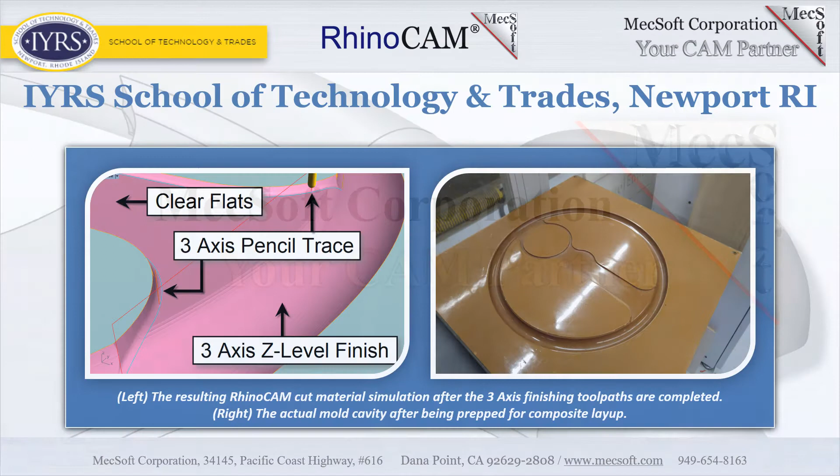Welcome to the MecSoft Student Project Series, where you can find real students in academia using MecSoft products in an educational setting. Today we'll see a composite marine steering wheel project created with the help of RhinoCam by student Simon Pride at IYRS School of Technology and Trades in Newport, Rhode Island.

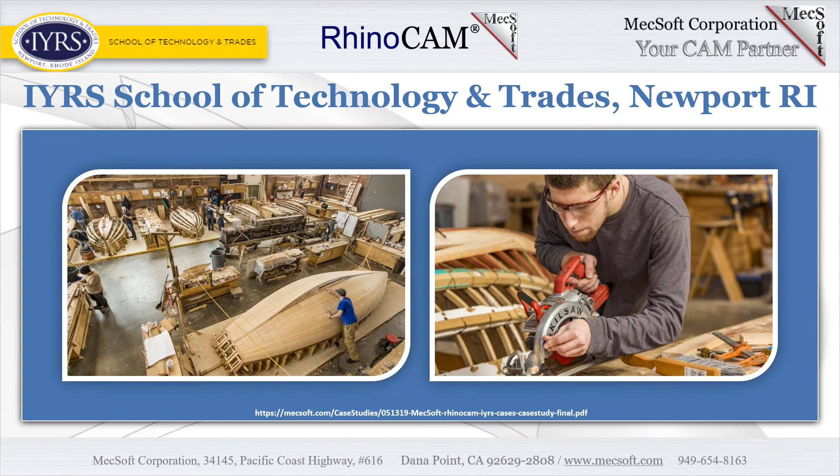IYRS School of Technology and Trades is a nonprofit post-secondary experiential learning school located in Newport, Rhode Island. The school offers education and training programs for craftspeople, artists, fixers, technicians, thinkers, problem solvers, and creatives.

The school is located on Aquidneck Island, whose yacht-filled harbor once hosted the America's Cup, a renowned annual sailing regatta for many years. The school's alumni are rapidly employed into the local shipbuilding industry, which helps make Newport one of the most popular lifestyle and tourist destinations on the New England seacoast.

Composites technology. Composites are broadly defined as materials in which a binding agent, such as resin, is reinforced with a strengthening material, such as glass or carbon fibers, within a mold. Kelsey Britton is the Composites Technology Program Manager and instructor and considers shipbuilding to be more of a way of life rather than a job.

Her mother taught Kelsey how to sail as a child. Her brother is a ferry boat captain in New London, Connecticut, and her father is a career marine mechanic and manager. Kelsey started her career in hospitality, doing everything from bussing tables to managing entire restaurants. Soon, however, the love of the boat-building trade urged her back home, where she enrolled and excelled in the school's yacht restoration program. Kelsey made such a positive impression on the staff that in no short order she was offered and accepted a full-time position to teach at the school she loves.

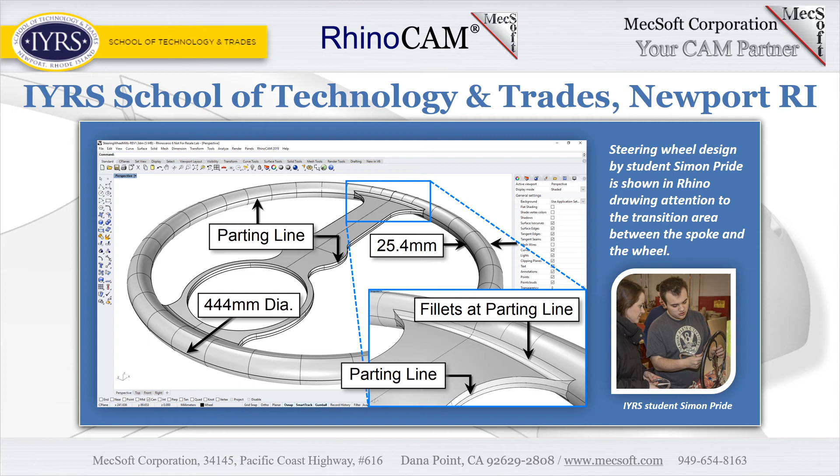3-axis Z-level roughing in RhinoCam. On the left, we see the bottom cavity mold half for the steering wheel. The view shows where the center spoke transitions into the outer wheel. On the right, we see the cut material simulation and in-process stock left after a 3-axis Z-level roughing toolpath using a 3 millimeter diameter end mill.

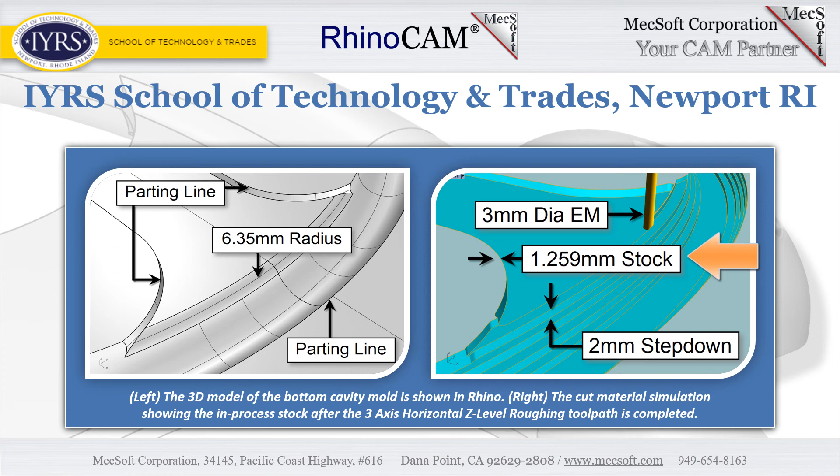The cut parameters include a stock allowance of 1.259 millimeters, an offset cut pattern, mixed cut direction, an inside start point, and a 40% tool step over. For cut levels, a step down distance of 2 millimeters and a maximum top Z height of 50.8 millimeters. The clear flats option is also checked, which ensures that a cleanup finish pass is located on the floor of the spoke cavity. The 1.259 millimeter stock allowance ensures that only the vertical sidewalls of the spoke need to be finished.

3-axis Z-level finishing. Two 3-axis Z-level finishing operations are performed using a 3mm diameter ball mill. The first finishes the outer wheel cavity, and the second finishes the inner spoke cavity. This is followed by a 3-axis pencil trace operation using the same 3mm ball mill as a finishing pass. It calculates the bitangent path between the spoke floor and the drafted spoke sidewalls. On the right, we see the right side image of the actual mold half after being prepared for composite layup.

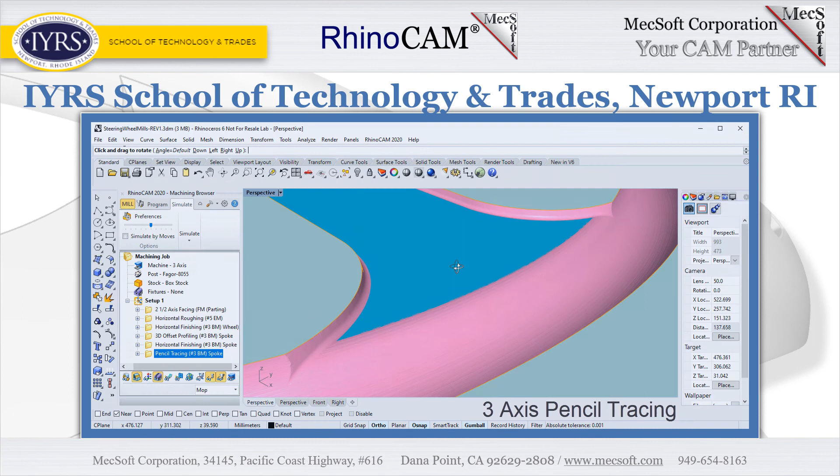Here we see student Simon Pride preparing his composite marine steering wheel for assembly. With assistance from IYRS staff, Simon submitted his unique design to the U.S. Patent Office for consideration. Way to go, Simon!